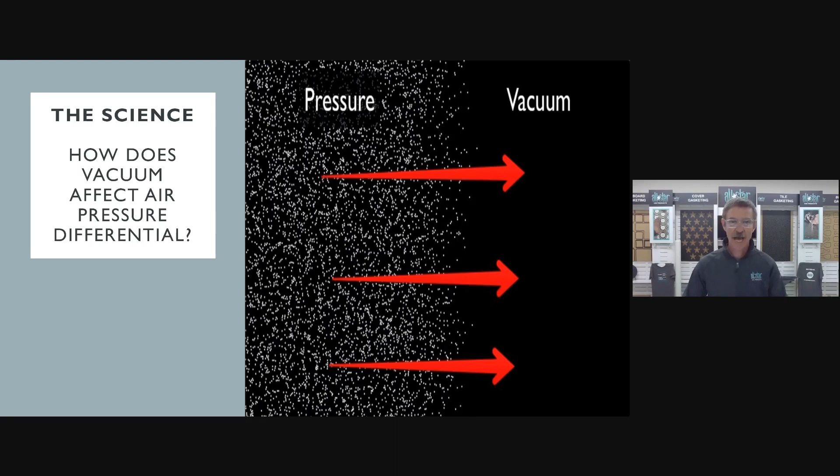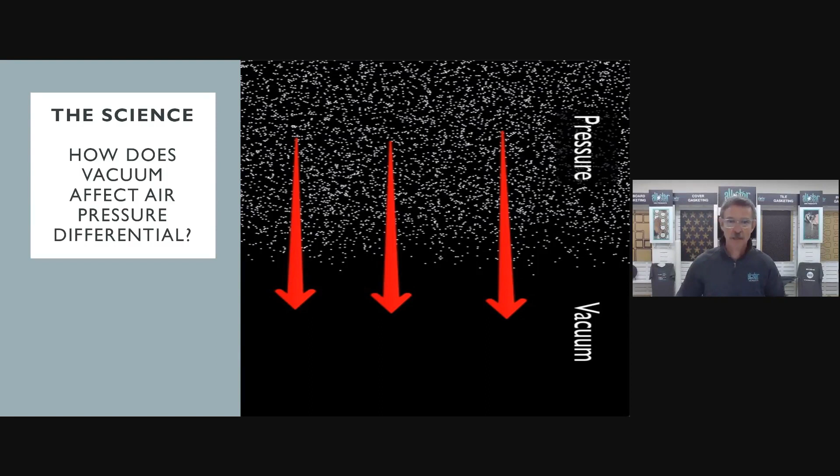So it's a big difference between downdrafting, where you're almost asking a wind to hold a part in place, and vacuum clamping that we're going to get into here, which is a different science. We're not just improving things, we're changing it. So we want customers to get their minds around the vacuum concept. If there's a void of pressure, the pressure is going to go up against it. That's what science says. And in the router world, it probably looks a little bit more like this, right? We want that pressure of the atmosphere to come down on the part and hold that part in place, so that the more parts you cut, they're staying still and you're cutting them fast.

So air pressure differential is also used on this planet in other manners. Anyone that's ever flown in a plane is taking advantage of air pressure differential. The air pressure above the wing is less than the pressure beneath the wing, and that's what causes that plane to lift in the air. So if we can get a 747 to 30,000 feet, maybe we can use that same pressure differential to get a drawer front to stay down on your router.

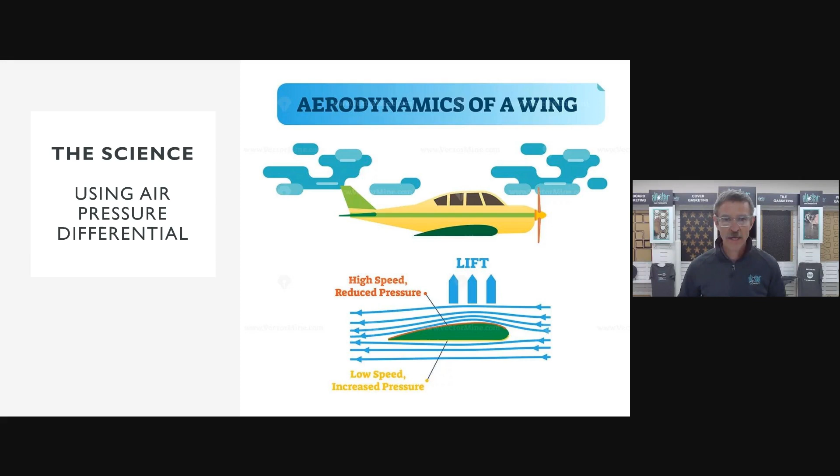So when we get into this idea, we know that all of the customers we've dealt with over the last couple of decades are unique. There are so many variables that each shop is going to come to us with. There's a list of them here. We can go through types of routers, the strength of the vacuum system that they're using, the size of the parts. Are they cutting plastic? Are they cutting wood, up spiral versus down spiral tooling, elevation levels? There's just a laundry list of variables that factor into each shop and how they manage cutting their parts. So we know that there is no one size fits all, because there's always a variable that's going to change from shop to shop.

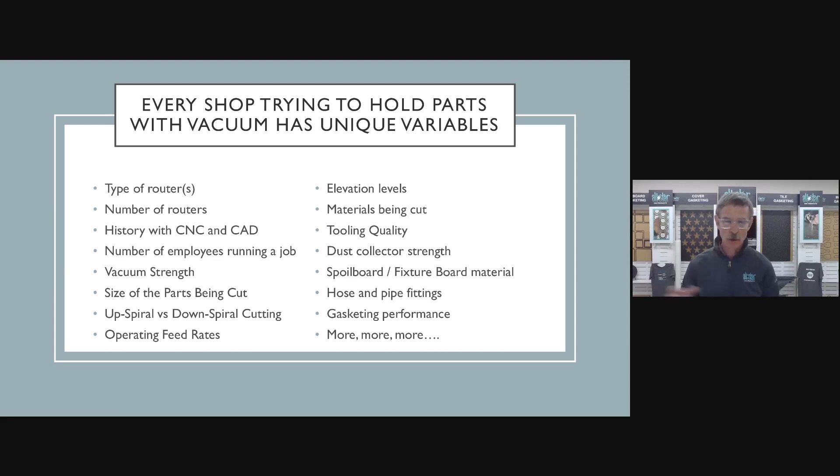And knowing that each shop is a little bit different, there is going to be no easy answer. So we'll go through a whole bunch of different options here based on what is going to be the best fit for you. So ultimately, the test is, can I hold my part? Yes or no, right? When customers can hold their parts successfully, they usually don't call us, right?

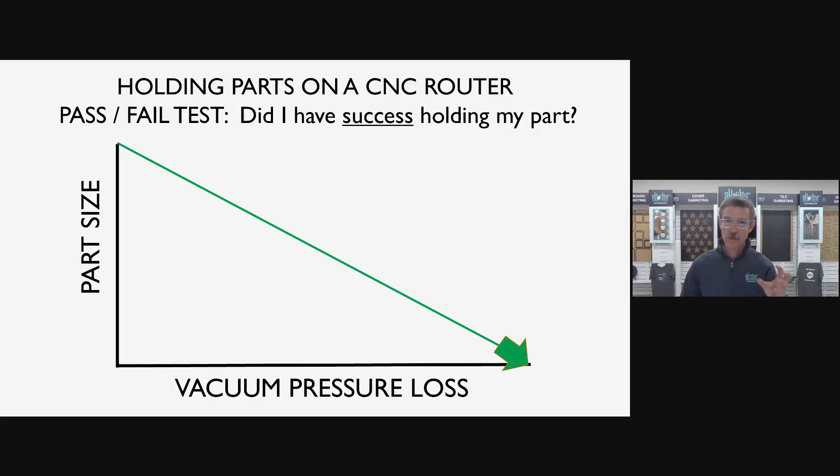We don't get calls from people saying, hey, my vacuum's working great. What are you guys up to? Our phone rings when customers can't hold parts and they need to get better vacuum performance. And why can they not hold their part? Well, there's usually a couple of variables playing in there. As part size gets smaller, as most of you probably experienced, it becomes difficult to cut. Vacuum pressure loss is the other variable that we need to account for.

And as vacuum pressure loss increases, at some point, there's the place where you can't hold your part, whatever part that is, whatever vacuum pressure loss it is. So that is the area that we need to concentrate on. And the fact that we can't change the size of the part means we've got to change the only other variable that is available to us, which is vacuum pressure loss. So with the gasket solutions we're going to get into here, the main concept is to prevent the loss of vacuum pressure, prevent the leak of vacuum pressure, because leak is the enemy.

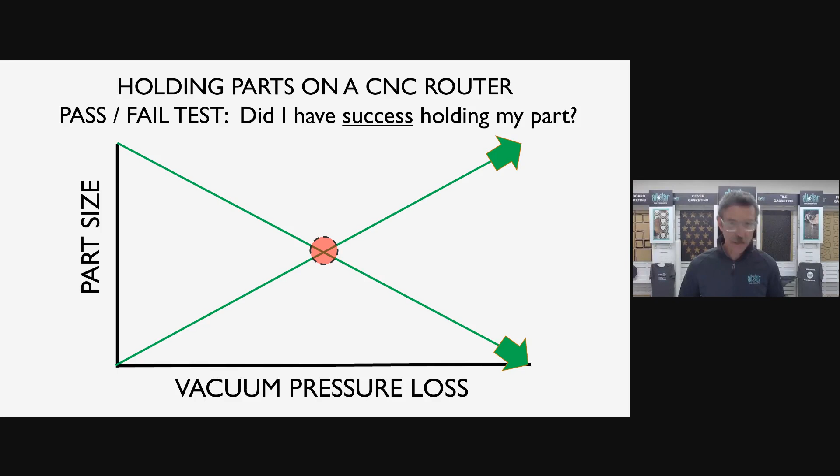Your vacuum pump is capable of great things. It's not always the size of the pump, it's how you use it. So it's capable of great holding power as long as we eliminate the leak that is inherent in the system. So we can get into that a little bit here. First off, very first question that we ask those customers who call us, like I say, they're usually the folks that are having trouble holding their parts. So when that phone rings, the first question we ask, what type of router do you have at your shop there? And when was the last time you changed the grid gasket in that machine?

Because I think we have to start here. A lot of folks are interested in their parts for good reason, but we have to start at the base, what we call the foundation of the house. So we always talk about the grid gasket, what kind of machine do you have, and do you have that thing set up properly? So in order to do that, we're going to send you guys a quick poll here. Second quick poll question of the day. When was the last time you changed your grid gasket? A couple of different options up here if you guys want to submit some answers.

We always want to know what machine we're dealing with, it gives us an idea of what kind of vacuum strength it has. And we want to make sure that customers are getting the concept of a fresh seal in that table. When customers haven't replaced their seal in a couple of years, or maybe since they bought the machine, sometimes a fresh seal under that spoil board is all the improvement that they need to cut those parts. So let's get some of those answers coming in. You guys can take a look at those.

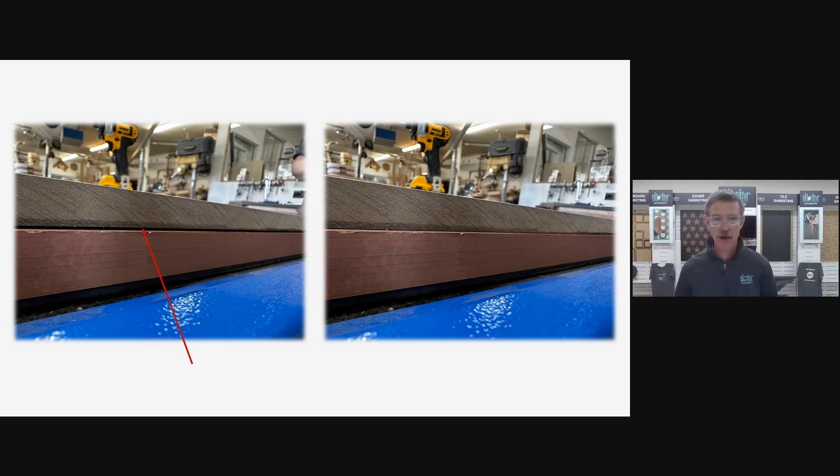But if there's a gap that exists there, vacuum pressure is somewhat like water. It's going to travel the path of least resistance. The easiest way out is where it's going to head. So vacuum pressure can certainly escape from a gap like this. Picture on the right, a little bit more sealed, and we've done that with the gasket material in there in this regard. Oops, let me, there we go.

New toy. So that gasket in that table there, as you can see, sticking proud above the channel by about 1/16 of an inch in this case. And when that vacuum engages and that gasket sucks down, brings that spoil board flush up against the table, eliminates those leaks, eliminates the gaps where that vacuum pressure is going to get away from you. We want to make sure that that table is sealed all the way around. And we do this a few different manners.

The grid gasket is intended for all of our customers. Anyone that's using a router with a grid table, I believe, should use grid gasket in there. Anyone that says their machine doesn't need grid gasket, I would have a respectful disagreement with that. I think gasket seal is a great solution to get that lip of the freezer door mentality.

We always talk about if your ice cream at home doesn't stay cold, don't question your freezer. Let's check the lip of that freezer door first. Make sure that cold air stays in there. And for a router, let's make sure that vacuum pressure stays in there. And we have to maintain it in all the manners that we can. And especially tables with multiple zones here.

The grid gasket rules of thumb that we've passed along over the years. One size does not fit all. As I say, there's a lot of different machines out there milling their channels at different sizes, different widths, different depths. So we have to assume that there is no one size fits all. Channel size dictates gasket size. Let us know what that channel size is, width and depth.

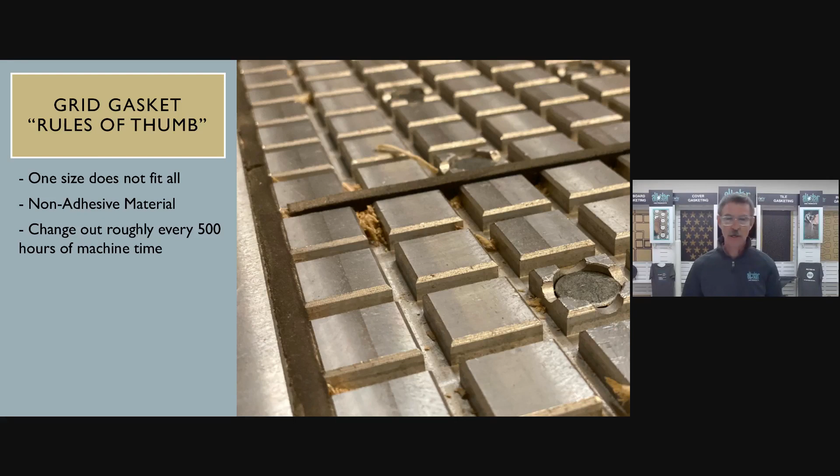If you change the oil in your car every 3,000 miles, let's use the 500-hour mark as a good time to replace that seal. It is much like a filter in your house. Get a good seal to get maximum performance out of that vacuum system. And vacuum is really the only tool that is often used to hold parts. We're not using vacuum and clamping, vacuum and gluing. If you're using vacuum, as we say, let's max the vac, and this is where it starts.

Other rules of thumb that we like to talk about is round pegs don't necessarily fit into square holes. So why we put round gasket into square channels is a mystery to us. We always think that square gaskets are a much better fit. You can see these round cords, very often oversized, which is good. You want it to be taller than the channel, but round cord is often wider than the channel as well.

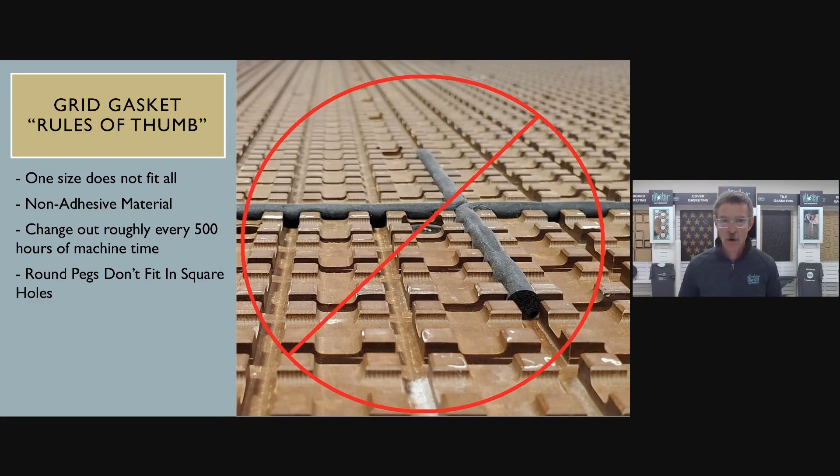And as a human, getting a wider gasket into that channel, you've got to stretch it, you've got to mash it in there, and that leads to some irregularities. And you can see that right here in this photo, where what we like to do is provide our square gasket. We cut it with our equipment here, cut it to the width and depth that is required for your machine, so we get a proper fit in there, consistent, less leak.

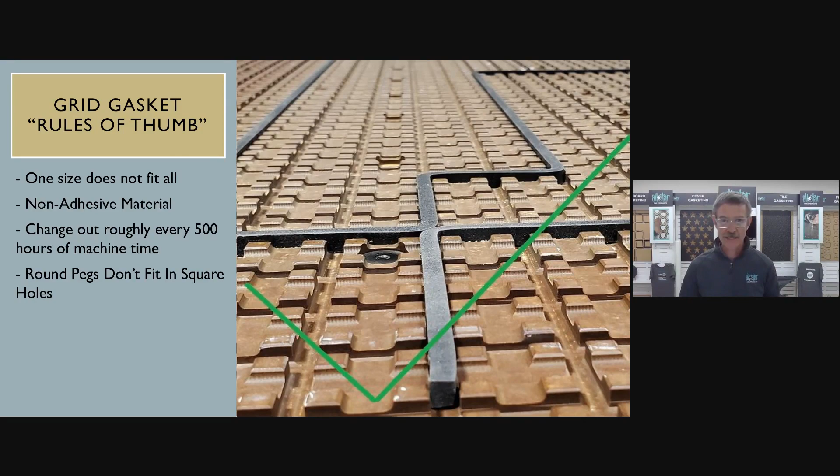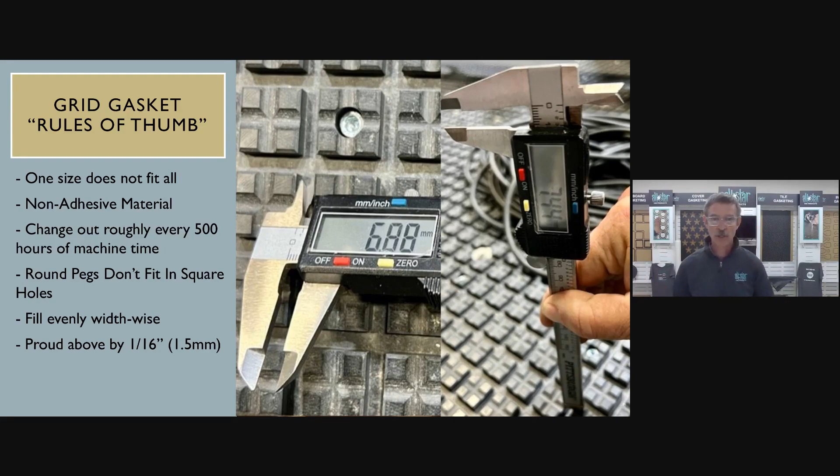That's the number one thing. And so we ask customers to measure both the width and depth of those channels. And as we say, if it's square, we're going to get you a square gasket. Some channels are rounded. Some different machine manufacturers will put in a rounded channel, so maybe we'll put a round cord in there. But really, each machine is a little bit different. We can help you out to figure out which one's going to be best for you.

Some examples that we'll look at over the years as we go to customers that have part hold challenges and everything looks good. But as we start to take the spoil board off and start to explore why they can't get vacuum part hold, we'll start to see things like this. This was a customer that had a pretty major gap right in his grid, trying to make a grid table, and that gap, combining those two boards, was the massive loss of air that he was getting. He wasn't getting that vacuum. He was just trying to use that wind of a vacuum cleaner versus a void of air. So this gap here caused a problem.

Other problems that some shops may deal with: very often we hear of customers who are screwing down their spoil board to the table. And sometimes if they take those screws out, those extraction marks will cause some irregularity in the table surface, and that spoil board can't flush out. So again, there's more gap opportunity for that vacuum to escape, and that's what we don't want. So we sanded down that table, made it flat, made it flush against that table. Much better vacuum performance once we did that.

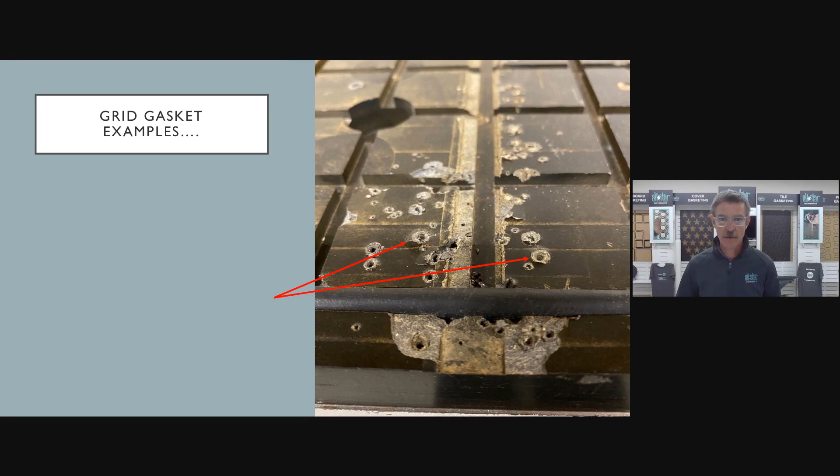For all the companies using gasket under their spoil boards, many folks are doing that, but I've yet to meet the company that has invested in a CNC router in order to hold spoil boards, right? We're always after parts. So anybody that gaskets their spoilboard, I think, is doing a fantastic job. But maybe there's an opportunity here to go a little bit further.

And in that regard, we'll launch another poll here. What is vacuum clamping? That's what we're about to get into. It's one thing to gasket under your spoilboard, but now let's deal with parts. And vacuum clamping of parts is really the sea change that we're trying to get into our customer shops. We're curious what you guys know about vacuum clamping, how it works, and there's a couple of questions that we'll put out to you to see what you think.

And I will close my screen here. Fantastic. We'll look forward to seeing some of those results as they come in. Maybe we can share them towards the end of the presentation as well. So we got quite a few responses here, Mike, and it looks like they've been listening, because everyone has answered B, using a vacuum chamber to create negative air pressure under parts. So good listening, everybody, and let's hear a little bit more about vacuum clamping from Mike. And this will all be on the test later, so good job, everybody.

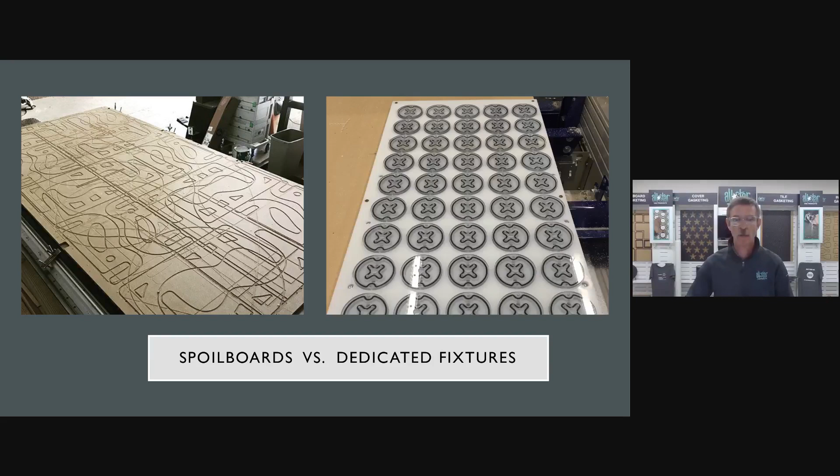So the easiest way that we determine what product line we're going to recommend to a customer is to ask them about the parts that you're doing. Are you better off using a spoil board or a dedicated fixture? Because I think those are two different things. A spoil board to me is a board that is intended to be spoiled. We're going to spoil it. It's a consumable surface because we have so many different parts to make.

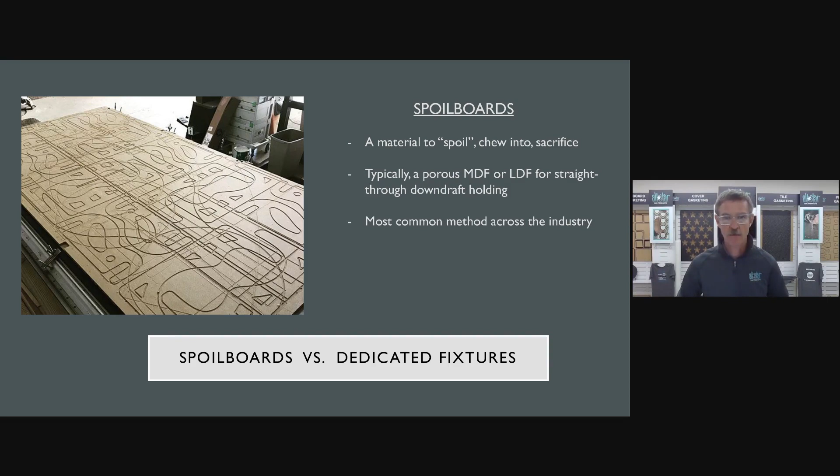We have that sacrificial cutting board under your parts that you chew into throughout the day, fly cut it every once in a while when vacuum performance degrades. Typically, all the wormholes that go into an MDF spoil board, a porous board, lead to some of that leak. So you need to fly cut to improve the vacuum performance, because it's the leak occurring through all those wormholes that requires that improvement. So that is an MDF spoil board, very commonly used throughout the industry, probably the most common application for CNC routers throughout the world.

As opposed to a dedicated fixture. A dedicated fixture is a dedicated board, and I think the best ones are airtight. Let's make it out of Baltic birch or an HDPE material that doesn't leak vacuum, doesn't leak through the sides, doesn't leak through the tool channel. Some people will edge band their spoil boards. We'll talk about that more in a moment.

But the airtight dedicated fixture, if we spend some time to make an airtight fixture, most customers will tell us the time they invest in making that fixture more than makes up for itself in the time they save once they put those parts into production and really get more parts, less time, eliminate the onion skins, the tabs, the low feed rates. So a great option for those production shops is the dedicated fixture.

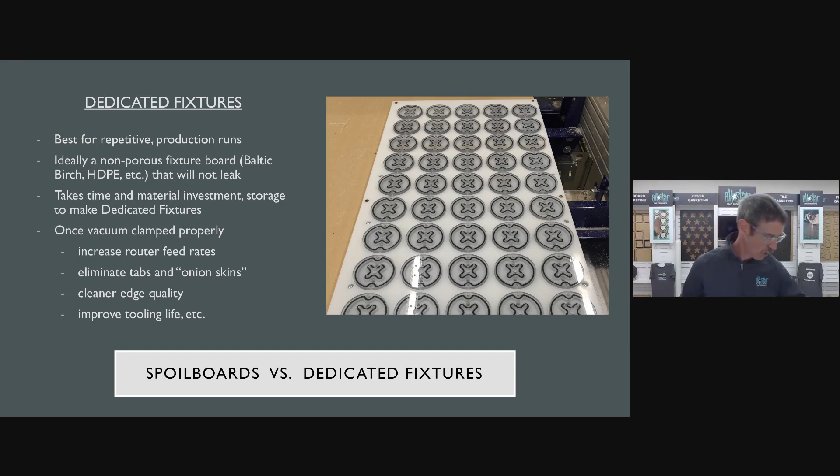So that will bring me to this screen here, going through the difference between downdrafting and vacuum clamping, because that's really what we're going to get into here. Downdrafting through an MDF spoil board versus vacuum clamping, I'm going to let Alex take over a little bit to talk about the science between the two. Thanks, Mike. Appreciate that. So as we illustrate here, these are comparisons between downdrafting and vacuum clamping. And I think what's great to do here is paint a scenario for our attendees, many of whom might be nodding their heads when we talk about this.

When we looked at the polls and who's in what industry, many of these attendees are running nested programs. No matter what software you're using, once you've laid out your project, oriented your parts, you're ready to go. You put your sheet good on your CNC and you hit go. Well, at that time, and that time only, if you have a vacuum gauge, it would register its peak value during that project. Once you begin to cut, the vacuum gauge is going to decrease over time through that project.

And the reason for this, of course, is physics. Air is a fluid, and physics dictates that air will always travel the path of least resistance. So when the vacuum gauge is at that peak value at the beginning of the project, in my humble opinion, that's not indicating vacuum hold on the part. That's actually indicating resistance to the vacuum system. When you put that sheet on there, you've created a dam, and that pump is struggling to pull air through that open MDF. As we cut, we're opening up channels and creating less resistance, and that's where the air is going to flow.

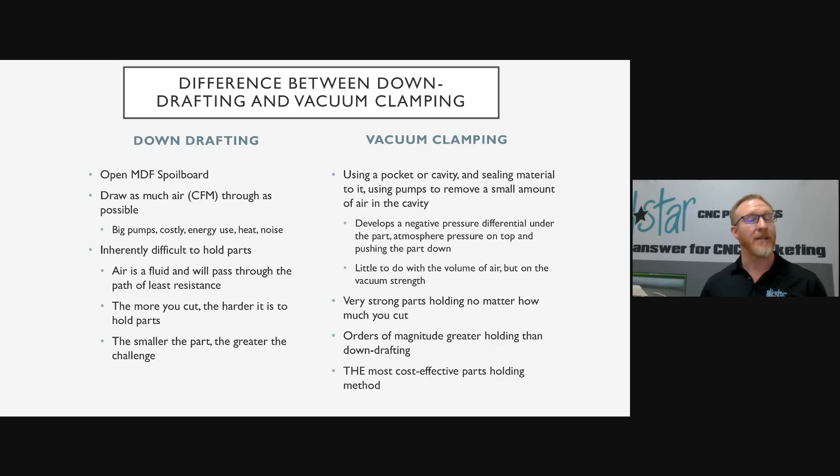So downdrafting is inherently difficult. It's almost flawed by comparison to vacuum clamping, because the more that we cut, the harder it is to hold parts. And the smaller the part, the greater the challenge. I'm going to share a quick video here. This video has been shared a lot, but maybe some of you haven't seen it yet. It really illustrates this aha moment.

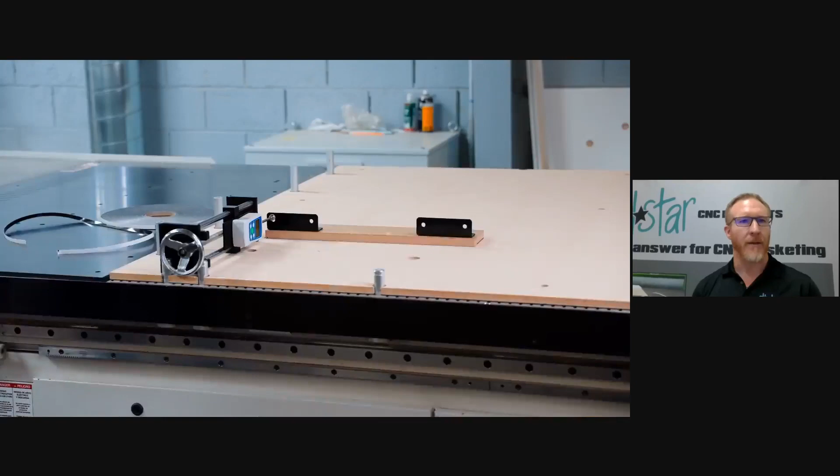And here we have Mike. We're at a customer's facility, and we have a test gauge that we're using. Here we put a typical drawer front on the open MDF. All that air is flowing around it. We're turning on the pumps and trying to see how much pressure it's going to take. It was actually 21 pounds at its peak to kick that part out at its fulcrum.

So that's downdrafting. Now, what we're doing very quickly, very easily, in just a matter of moments, we're simply using a gasket to seal up against the part. And that gasket's not only sealing, but it's creating that vacuum cavity or that vacuum chamber. So if we're able to remove just micrograms worth of air underneath that part, turn that on, and then let's take a look at the difference.

We went up to 120 pounds of force to move that part compared to simple downdrafting. And that is the power of vacuum clamping. That's the physics really that we employ in all of the work that we do. So as we move forward and going through this entire presentation, it's really focusing on the science behind what we do, and hopefully that resonates with many of you and is informative as well.

So I'm going to pass this back over to Mike for him to go ahead and continue out this presentation.

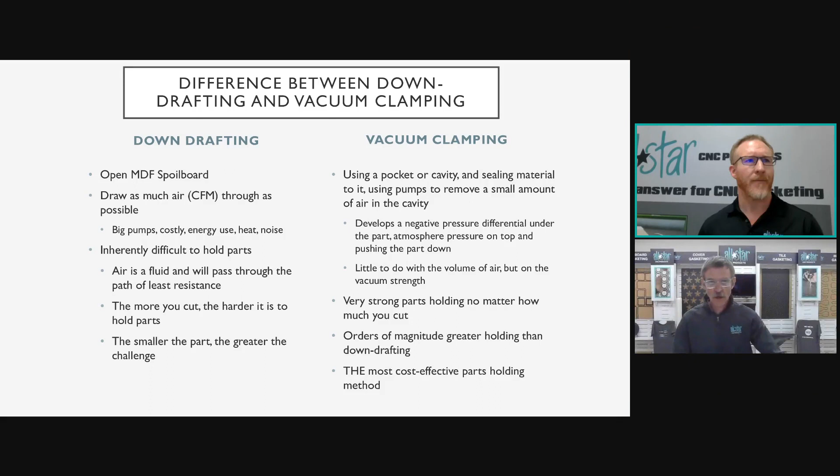Alex, thank you. Just to give a quick visual about what that vacuum clamping is. You can see a massive difference between downdrafting through that MDF spoil board and then introducing that gasket to create the cavity that we're going to pull the air from to produce that air pressure differential. So we'll get into a whole bunch of different ways to do it, but the science that is taking advantage of is always the same. Create the space, pull the air from, vacuum to hold on and clamp onto those parts. It creates more of a suction cup than just the wind of a downdraft through an MDF.

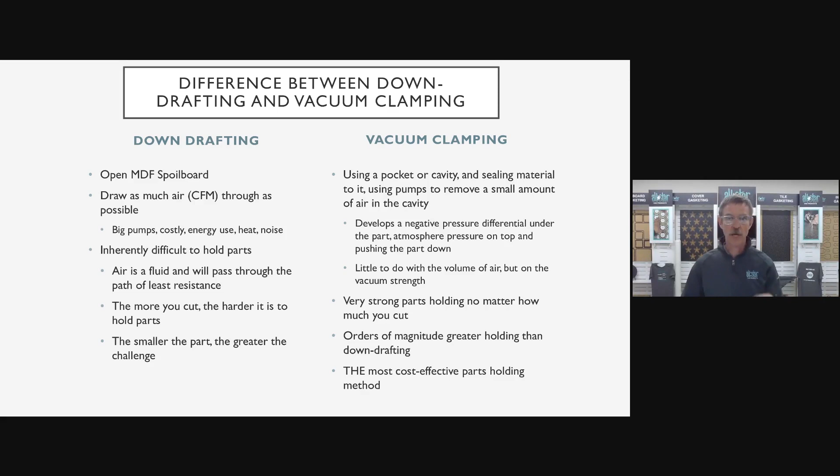So we'll get into it a little bit. And as we said earlier, there are no one-size-fits-all options that we have, and knowing that everybody's in different industry, some of these products may not be relevant to your particular shop, but we're going to go over a bunch of them to help you guys determine which one's going to be best for you.

So first ones we'll get into are the two different product groups that we have available for those doing dedicated fixtures. A lot of our furniture shops, maybe some guitar shops, anyone that's doing production runs, I think can be benefited by using dedicated fixture ideas. So we have the inboard and the cover gasket. First one we'll do is our inboard gasketing. In my opinion, I believe that inboard gasket is the premier way to do this.

A gasket in the channel is going to last longer. It's going to pull the part flush up against the fixture. There's a lot of advantages to an inboard gasket when you get into some of these. And as I said, it's intended for those shops doing production runs. If somebody has a very tight Z depth tolerance that they're looking to hold, inboard is a great solution for that because it will zero out while it disappears into the channel.

Also, anyone that's looking for the longest lasting gasket solution. The fact that it is in a channel, much like the gasket under your spoil board, it's only going to compress by the height of that channel. So it tends to last a little bit longer. It never really gets maxed out. So it extends its lifetime for those production pieces.

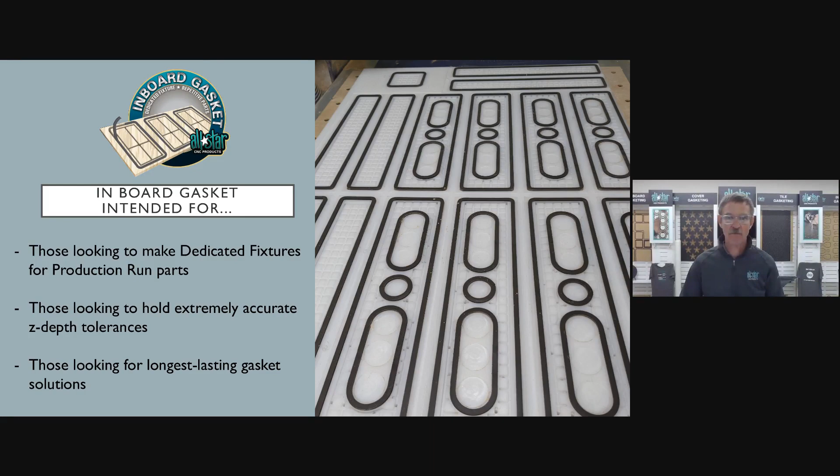Some of the rules of thumb that we talk to customers about, we always mention a 3-to-1 ratio is best when putting the gasket into a channel. Probably 1/4 inch by 1/4 inch gasket is our most common product, our CR 2525. And we usually recommend routing a channel 3/16 deep to leave that 1/16 above. Some customers need a little bit more than a 1/16 of an inch sticking above if they have a very warped or varied surface material.

And if they need more than a 1/16 of an inch, maybe we'll recommend our CR 50/50, which is a half by half, and route that channel 3/8 inch deep to leave that 1/8 above. So depending on the product, how much you want to leave above, but the 3-to-1 ratio is the number we've found to lead to longest lasting gasket material for those production pieces.

We also want to make sure that when we do go to a dedicated fixture environment, the fact that we're using a non-porous material, there is no universal vacuum draft, right? When we're using an MDF board, everything is held by default.

Whether it's good or bad, maybe is a different question, but MDF downdrafting universally tries to hold everything. Whereas when we go to a dedicated fixture that's non-porous, it's the opposite. Universally, it's not holding it. So we need to create vacuum for not only the parts, but maybe also the waste pieces and the offcuts, and make sure those things don't go flying off the table.

I think this is a great example of how I would do a dedicated fixture. Take the existing CAD program that you have that's going to be used for the tool path, and then just to the inside of that tool path, offset it and run your gasket channel. And then just to the inside of the gasket channel, create a third channel, which is your vacuum channel. And if we can run all 3 of those channels parallel to each other with a vacuum source for the

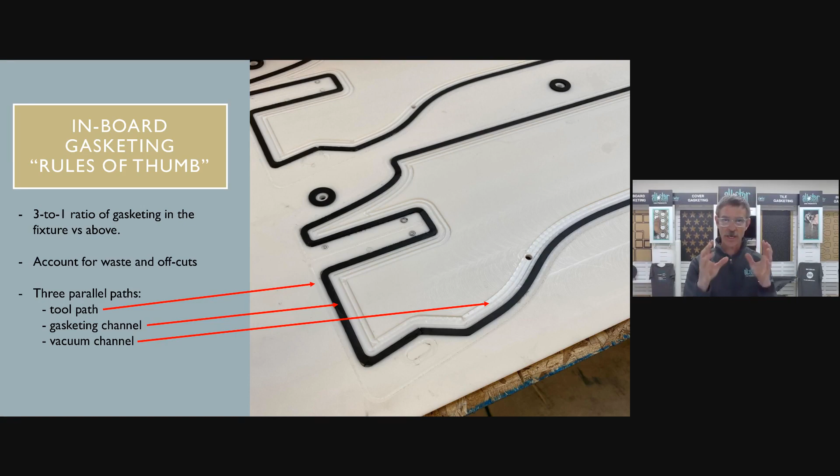vacuum, because the tooling is what's causing the carnage, right? The tooling pushing its way through the part is what's causing things to shift. So the closer that we can get that vacuum clamp to the tooling is what's going to lead to the most success in holding those parts.

We also recommend using a chamfer bit to create the channel for your dedicated fixture idea. All-Star has created a line of specialty chamfer bits for different size material: quarter by quarter, quarter by 3/8, quarter by half-inch gasket. We always recommend some of our chamfer bits. The 25/25, 25/38, and 25/50 represent the gasket size that you get.

And what that does, it just creates a slight chamfer at the top of the channel, so that gasket has an ability to zero out. You don't want it to pinch between the 2 surfaces, so that would do a great job of allowing that gasket a little bit of extra wiggle room, and we always recommend using those tools for that.

That being said, what we're going to do is send it over to Daniel. Daniel's going to do some live demos here, doing some of this inboard gasket to show some of the benefits of the chamfer tooling. Daniel, take it away. Mike, thank you very much.

So here we are with our vacuum tray. This is a collaborative effort to answer some of those desktop CNC routers that may not have vacuum. Those ShopBots, the Avids, the potential Onefinities, where a customer does not have a vacuum table but would like to add vacuum to their part hold. In this example here, we have grid gasket running down the channels surrounding these 6 vacuum ports.

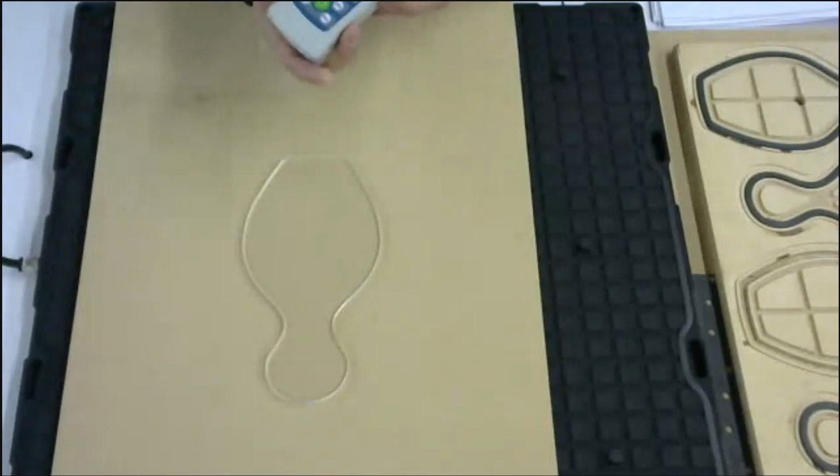In a production type setting, if we have to do 1,000 of these parts, what tends to happen is as we cut away from the main sheet of material, we'll end up having to do onion skins or tabs to hold small parts like this. As you can see, even with the vacuum on, the part is still moving. In fact, if I take my pressure gauge right here and give you an example, 2.6 pounds of pressure is all it takes.

So you can imagine on a large production with a tool going around the outer perimeter of the part, that could cause parts to shift, potentially kick off, be a hazard. What we want to do is seal the part, seal the space underneath the part, and create a production type model so we can lay different sheets down and continue to run without having to worry about parts shifting.

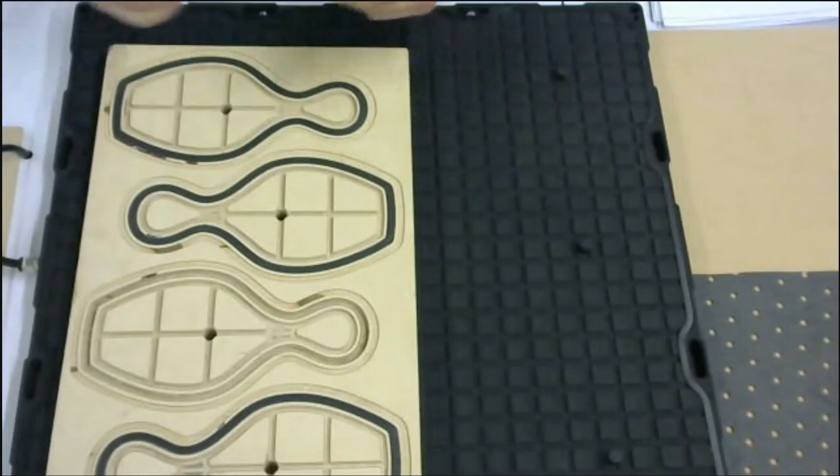So what I'm going to do is replace this with a non-porous material. In this particular case, this is Baltic birch. You can see, as Mike mentioned, we have our chamfer bit here. This was created to create a channel for the gasket to reside in. We have an outer tool path for where the profile of our part is going to be cut. Independent vacuum ports going directly to our vacuum plenum with a space for the vacuum to be pulled as well.

In this example, these 3 vacuum ports are closed off underneath. We are focused primarily on this single vacuum port right here. We have our part in place. And a leak somewhere.

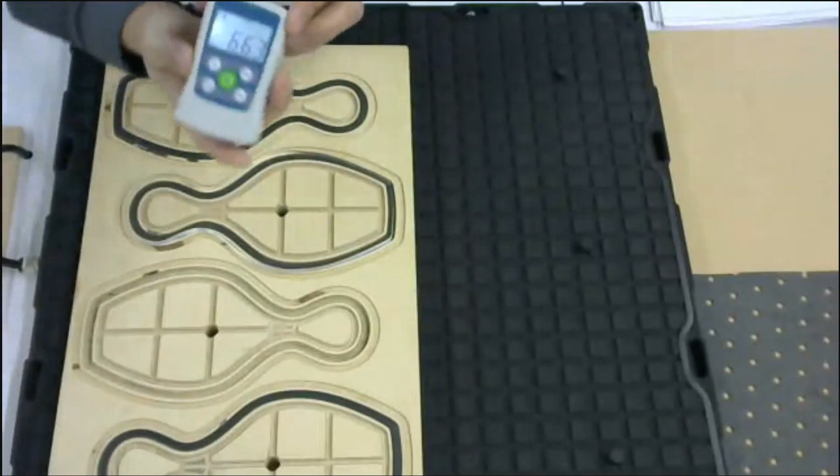There we go. We now have a part in place. There was a leak underneath the grid gasket. Now that that is solved, starting with the foundation of the house, of course, the pressure to move the part has jumped exponentially. I'm now at 66 pounds of pressure, and I was unable to move that part. So you can imagine the carnage of the tool path of the router bit; you want these parts to be secured in place. And this allows us to run multiple sheets without having to worry about onion skins or tabs that we have to clean up later.

I'm going to send it back over to Mike. Thank you very much.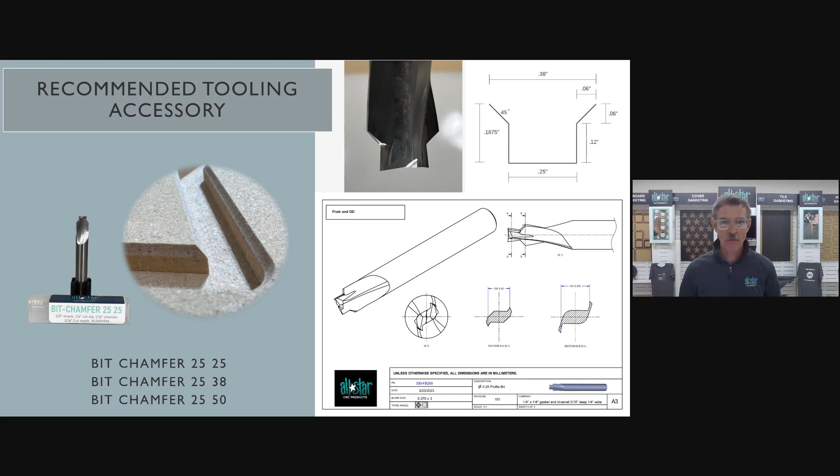Daniel, fantastic job. I actually enjoyed the fact that you had a little tough time getting that initial vacuum clamp, because that shows that if there's a little bit of a leak going on, that really solid clamp doesn't take effect, right? We're not getting vacuum because there was a leak somewhere and we had to reset that jig to make sure that it was airtight all the way around. And that's where we had the success. So great job of showing that all situations need to be accounted for and all leaks need to be eliminated. So that was a great job of showing some of those concepts.

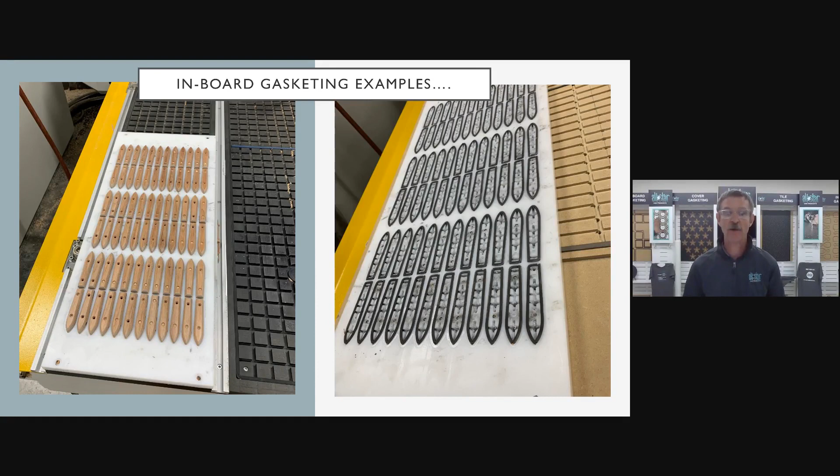Here are some real world examples that customers have sent us over the years. Knife handles, obviously a very small part. This customer was attempting to cut knife handles through an MDF spoil board and was having zero success. So he called us, we talked him through building a dedicated fixture for himself, and we're very happy that he found us in order to get these jobs done.

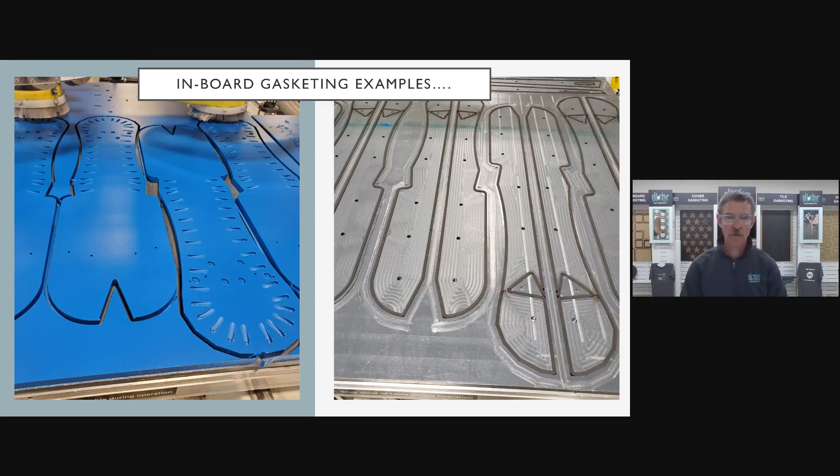Another customer, poly furniture, always a difficult product to hold and cut just because it's so dense and there are varied surfaces. Sometimes that man-made grain in the surface creates a great deal of gap, and that's where all that vacuum is escaping. So by creating a gasket seal all the way around there, it's much easier to clamp those pieces. And this customer is a big user of our inboard gasket material to get all that poly furniture out his door.

We have another furniture shop that made a fixture out of melamine. He even has these fixture parts raised up a little bit so we can do some profile work around the edge. But again, an airtight fixture. You can see the vacuum source, the vacuum channels running right parallel with the gasket path. So great options for those folks who are doing the production runs.

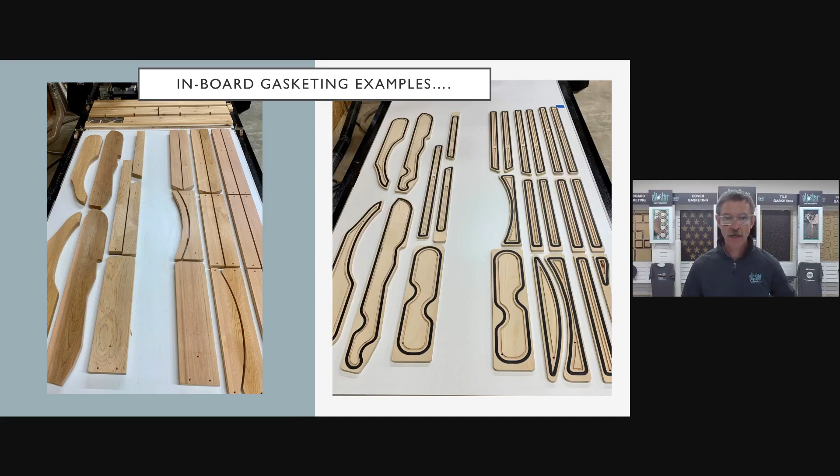Another great option came about based on another customer request, right? We're not smart enough around here to make our own products. It's you guys, the customers, that explain what your challenges are, and we work with you to try to figure out how we can address that. And as a result, that's where the product line has evolved from.

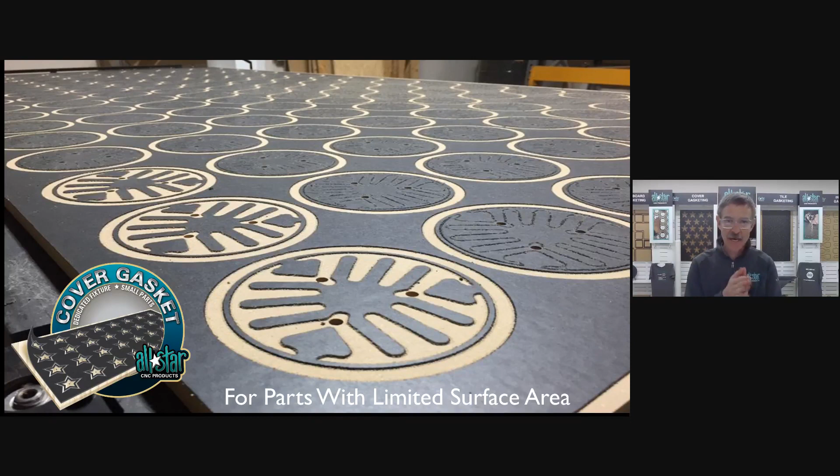So one of the questions that our customers had for us was, hey, can you guys make this gasket narrower? And we couldn't figure out why you wanted it so narrow. It's basically because he was doing really small parts, and what he wanted to do was get that gasket in and out of those tight areas. And he thought the thinner way to do it would be better. But as opposed to a thinner, narrower gasket, we decided to try out some cover gasket. And that's where this product line came about.

And it's a great solution for those folks with parts with limited surface area. It's really intended for, again, we're still maintaining the dedicated fixture environment. So those production run pieces, but maybe they're not large furniture parts. Maybe they're small, tight angles. I always like to use the example of a star from our customers, because all those five points of the star are very tight angles that would be difficult to gasket for with an inboard gasket solution. So limited surface area, tight angles, or parts with excess holes.

You can see this was a Christmas ornament that had a hole in the top. If your part has a hole, and you have a gasket perimeter on the outside, and then you put your hole in there, your vacuum chamber area has been compromised. So you're not going to get a vacuum clamp with just a perimeter on a part with a hole in it.

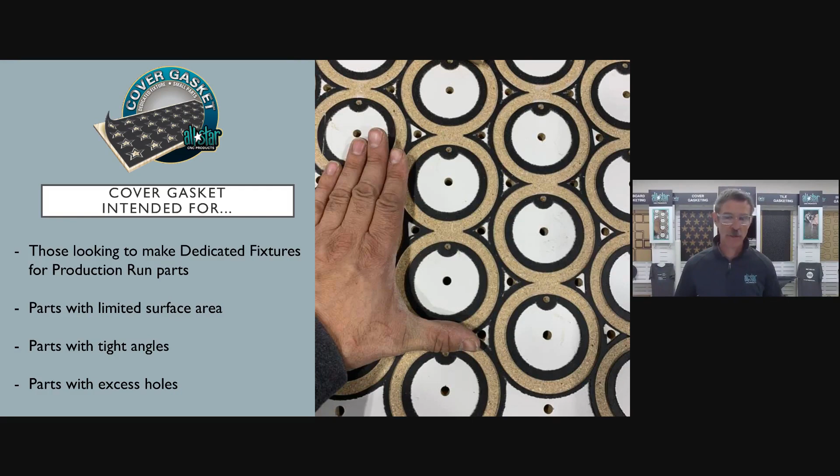So you need to account for that hole to keep that vacuum secure. So again, cover gasket, a great solution for parts with a lot of holes because you can account for that.

And again, still in the dedicated fixture environment, we always recommend folks use the full sheet, and we have some engraving tools cutting out, and you can use the existing CAD that you have. So sometimes the router itself can do a great deal of the fixture building for you because you're just offsetting some programs and downsizing to get your vacuum chamber area for your particular part.

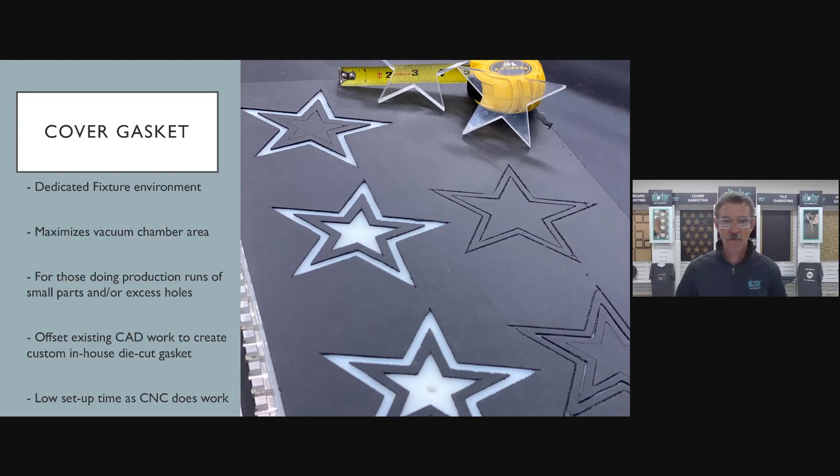The rules of thumb that we have, we always say that the thinner the better. The thinner the gasket, the less deflection it's going to cause, the less variance it'll create, the less jello effect it'll have. So the thinner the better, but of course you need to have enough thickness to counteract the variance in your particular material. So the more variance, the thicker it needs to be.

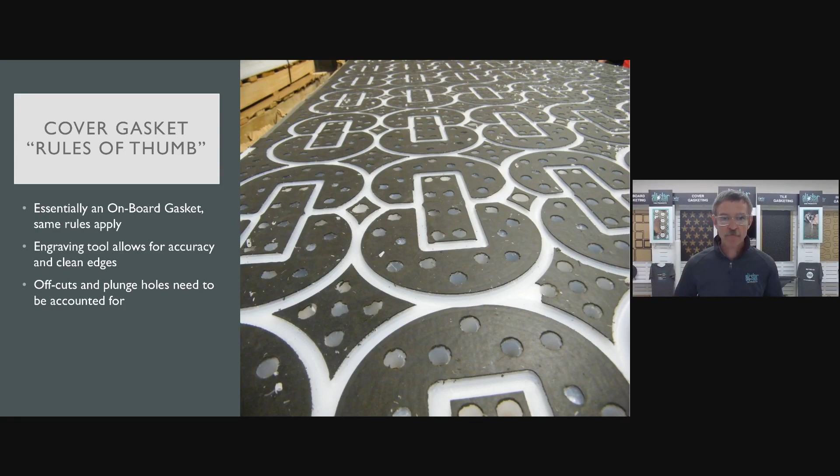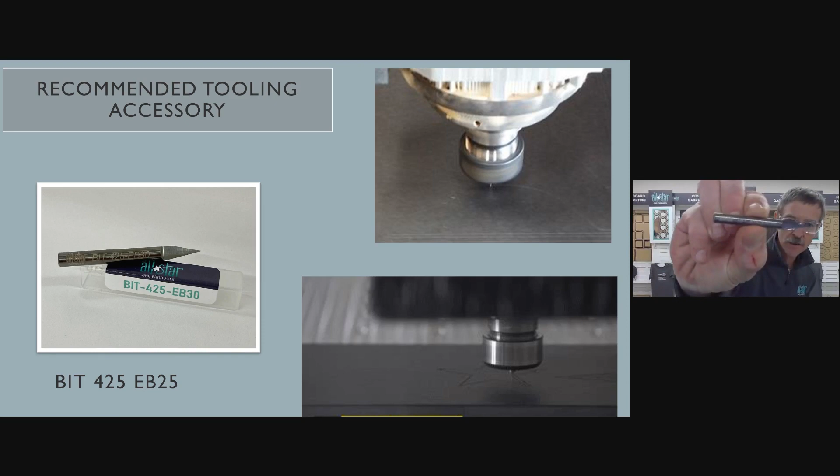Here is the engraving tool that we mentioned. Great solution, part of our custom tooling line. All-Star has the engraving tool to create all aspects of the cover gasket lines that you want to do. You can certainly use a 1/4-inch flat bottom bit, for instance, to cut through your cover gasket, but we find sometimes one edge of that path will be clean, the other will be a little bit rougher,

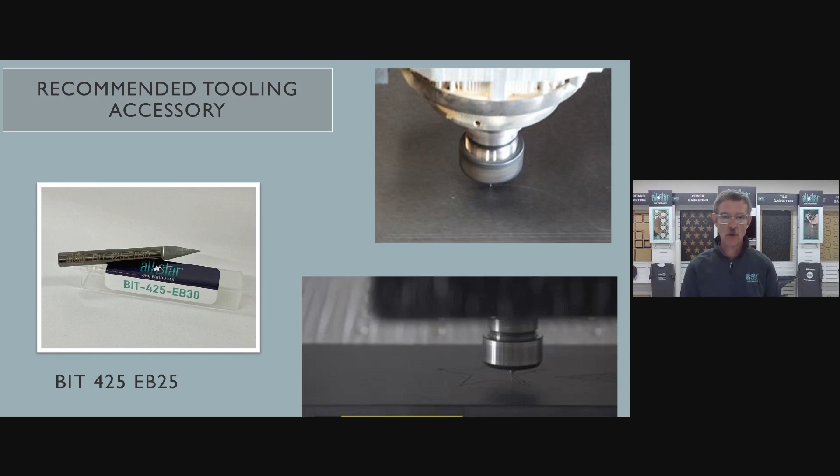and that rough edge of the tool path doesn't necessarily create a problem vacuum-wise, but in these production environments, sheets are coming on, parts are coming off. So sometimes that burred edge of gasket can cause some problems as we're trying to put stuff on and off. So an engraving tool is a great way to make a nice clean edge. And sometimes customers will even create their gasket channel a little bit wider than the tool that they're going to use. So a great solution for those kinds of shops.

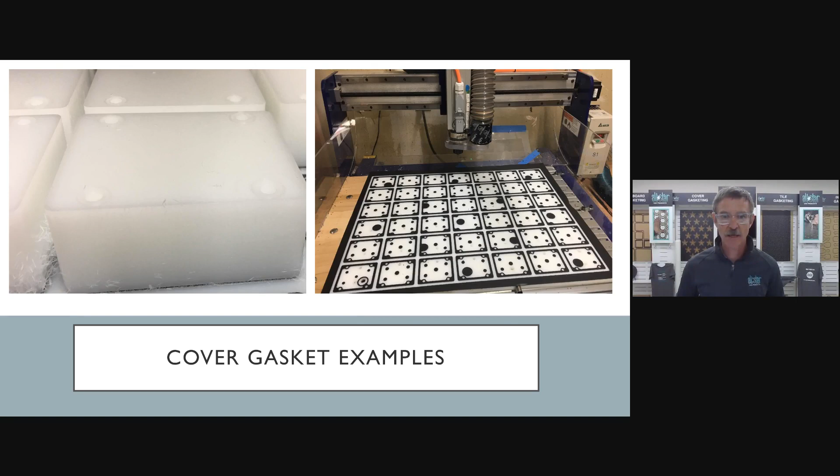Some cover gasket examples. Well, let me go back to this one here real quick. I like this one. Another example, a guy had 4 holes in his parts, in the 4 corners. So those are accounted for in the fixture on the right-hand side. Another example of a hole and a gasketed fixture for these small parts. So that is our cover gasket.

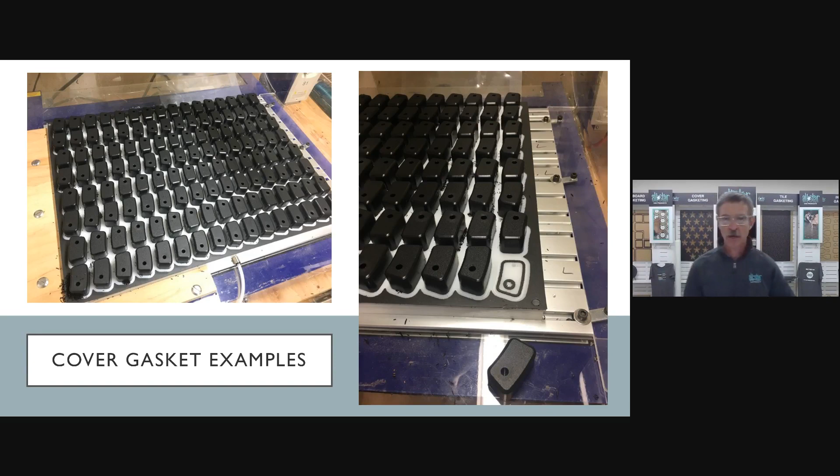So that leads us to the next customer request that we had, further product development, because we have a lot of customers out there that aren't in production environments, custom stuff, short runs. So they don't have the time nor the interest in making a dedicated fixture, but how can I get the vacuum clamp benefits without a dedicated fixture? And for those customers, we have 2 products for the spoilboard improvement. We have our onboard gasket and our tile gaskets. Both are great options.

We'll start out with our onboard gasket. The video that Alex showed earlier at a customer doing the push-pull gauge was a perfect example of an onboard. Real quick, real easy, doesn't take up a whole bunch of time just to stick that down onto the spoilboard to make that vacuum clamp area. The onboard gasket is intended for all those that want the vacuum clamp concept without the dedicated fixture investment. And it's a great way to do that.

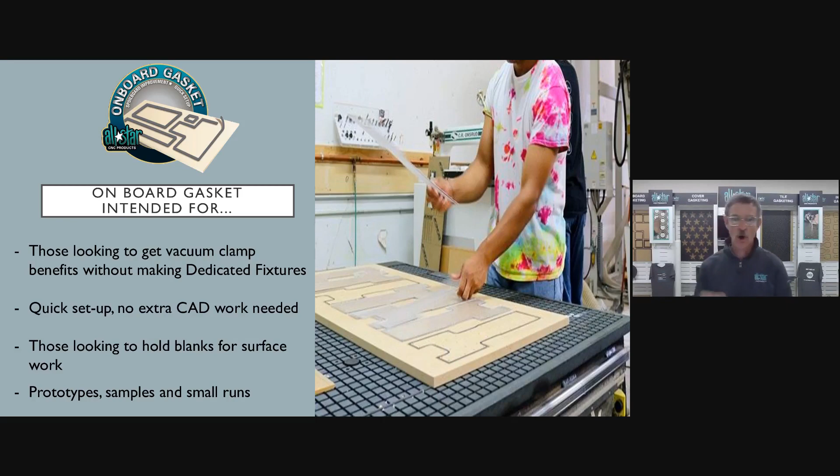Quick way to do parts, maybe some slabs that you want to do some surface work to. So all those things you want to do, quick works, prototypes, great solution. Onboard gasket is that spoilboard. It's a board that we're going to spoil, quick setups. And again, the CAD design can do a lot of the tool layout. Some of our customers over the years will scar the tool path into the spoilboard and then just lay this gasket to the inside of that.

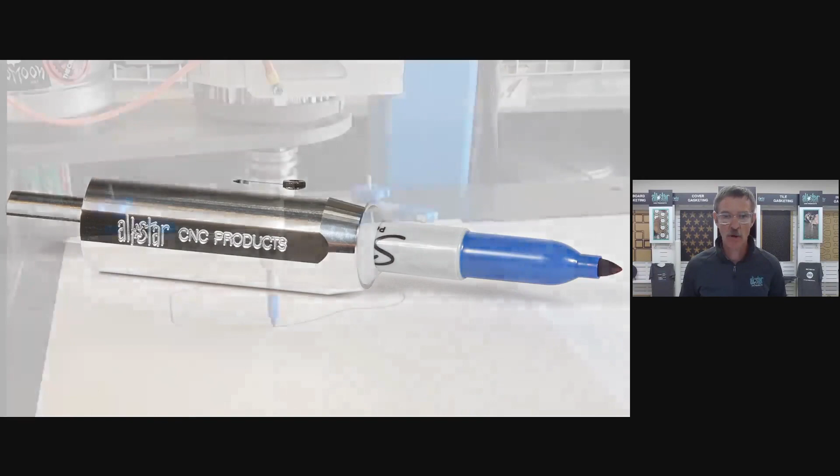As a result of hearing that, we have created yet another custom tool for our customers to take advantage of, which is our marker tool. The marker tool allows a customer to use the CNC to put a pen mark on the spoilboard to dictate where that gasket should be laid out. We can see a customer here laying out some gasket.

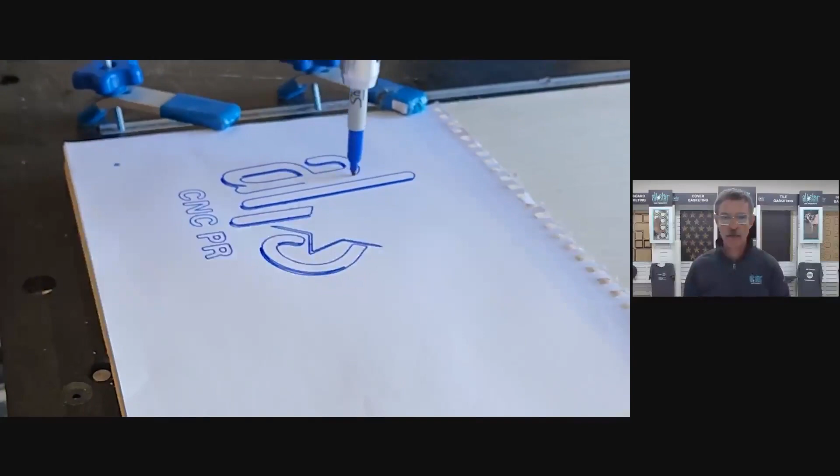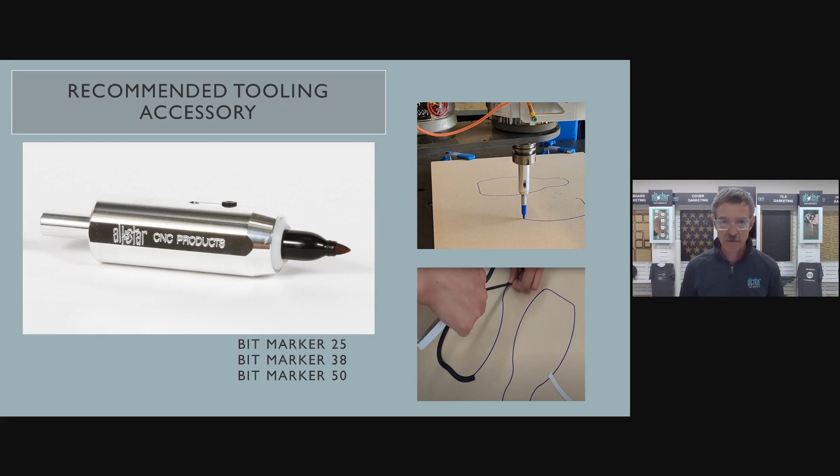And the advantage of doing it this way is, as we mentioned earlier, the more you use a spoil board, the more wormholes you put in there, which creates more and more leak. So customers who use the pen to stick gasket onto their spoil board in the exact right spot are also lifting their parts off the spoil board by a couple of thousandths of an inch. And as a result, if they can dial in their Z, these customers using an MDF spoil board never chew into that spoil board, and we're not spoiling it as much, not consuming it as much as without that gap, plus the advantage of massive vacuum improvement.

Also, the firmer, the better. We have a bunch of different densities for all these products. Typically, our low density products are meant for low vacuum systems. Luckily, the science of vacuum clamping is universal, but the smaller the vacuum pump, the less power it has, the softer that foam needs to be. But we still create a solid clamp. It just needs to be a softer foam.

Typically, the industrial CNC machines in the marketplace these days will use our medium density. That's the most common. And we have firm density for very heavyweight material. But the firmer, the better, because if you can compress it that first time, it's not going to get any harder over the years. And you always want to make sure that Z depth is accounted for, because it is a surface mounted material.

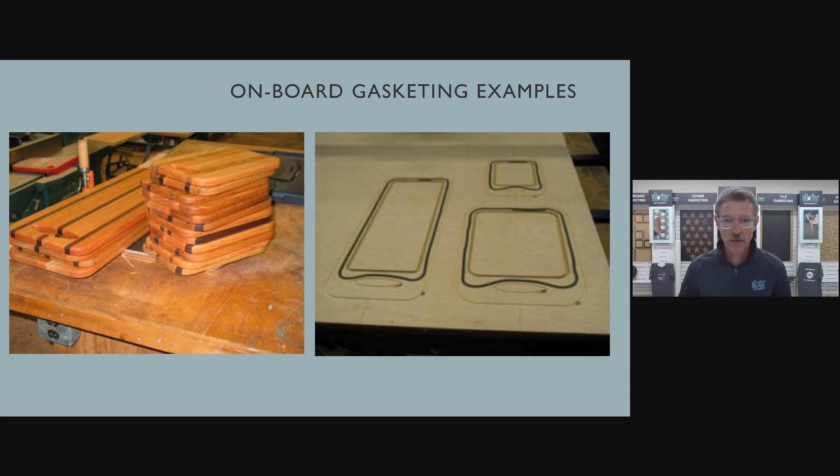And some onboard examples that customers have sent us over the years. We've got a guy who was having a tough time holding some of these cutting boards. So a quick stick down of gasket material allowed him to do these parts much quicker, much easier. And same kind of idea with this pizza peel. The customer had a tough time with those narrow handles. So a quick application of some gasket material certainly aided them in clamping that part versus downdrafting it. So I think that does our onboard gasket rundown.

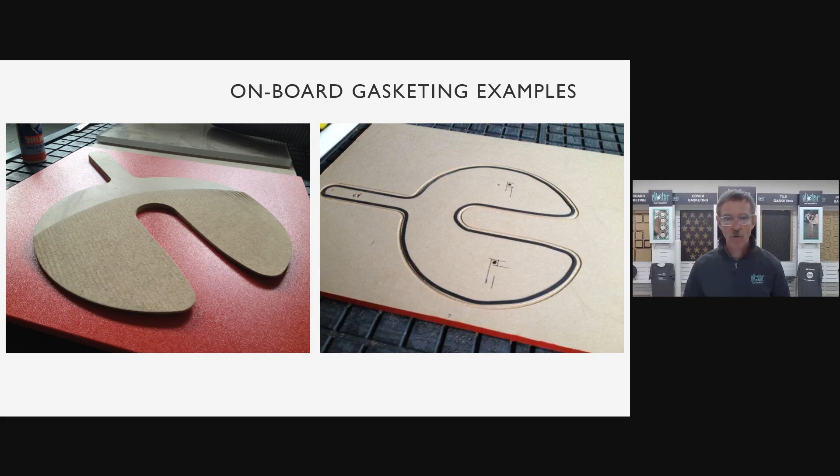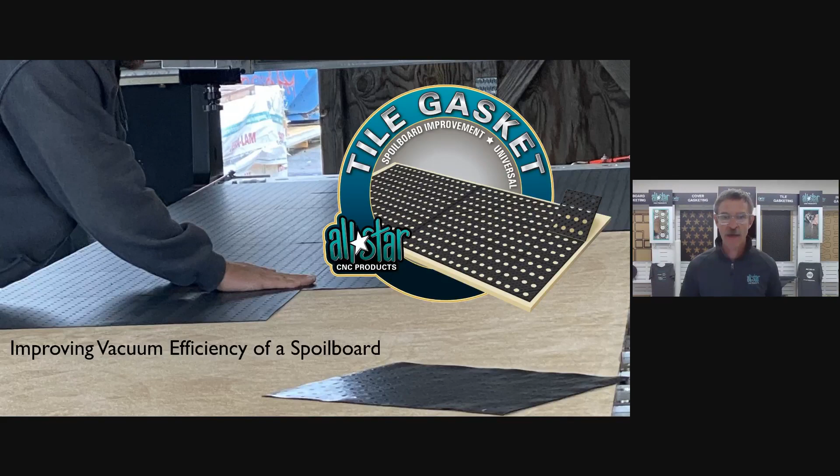So that will bring us to one final concept that customers have requested from us over the years. How can I get vacuum clamping on my always changing, always custom parts? What is the best way to achieve vacuum clamping in that kind of environment? And that is where our tile gasket material came from. Tile gasket is pretty unique, pretty inventive on our end, and there's a lot of interest in it.

And before we get into some of the benefits of tile gasket, we've got another poll question I want to get into real quick: how many of you out there seal the edge of your spoil board? Whether it be painting it, running it through the edge bander, or putting some kind of water glue mix onto the edge of the spoil board. I'd be curious to hear how many will seal the edge of their spoil board for whatever reason.

And, Margaret, it looks like we've got about half and half, yes and no. And as Mike's going to explain, tile gasket somewhat seals the top of your spoil board, but you're still going to get leak laterally on the edge. So sealing the side of your spoil board is very important. We're still about 50-50 on yes and no. So Mike's going to talk a little bit more about our edge seal tape. And I'm going to close this poll up.

Right, Margaret, thank you very much. And it's interesting. I always like to ask that question of customers. Are you guys edge banding or sealing the edge of your spoil board? And I ask them, why do you do that? And it's to prevent the leak out of the lateral sides of the spoil board. And I get that. I approve of it. I think it's a great idea because all leak is a problem. The more leak we can prevent, the better.

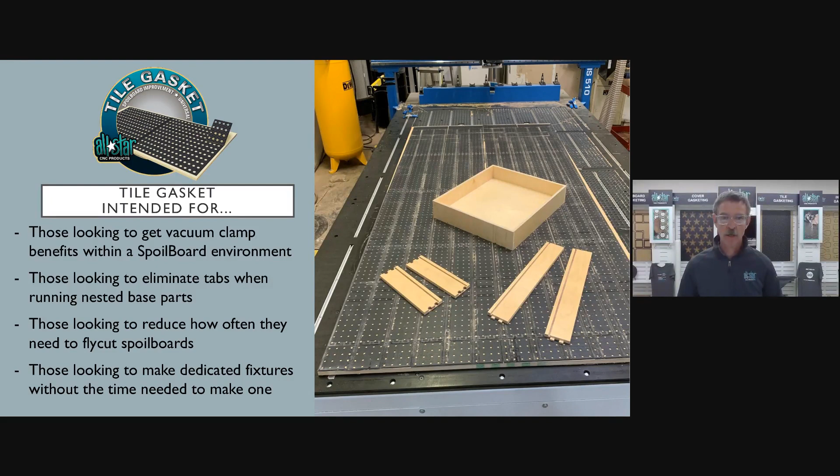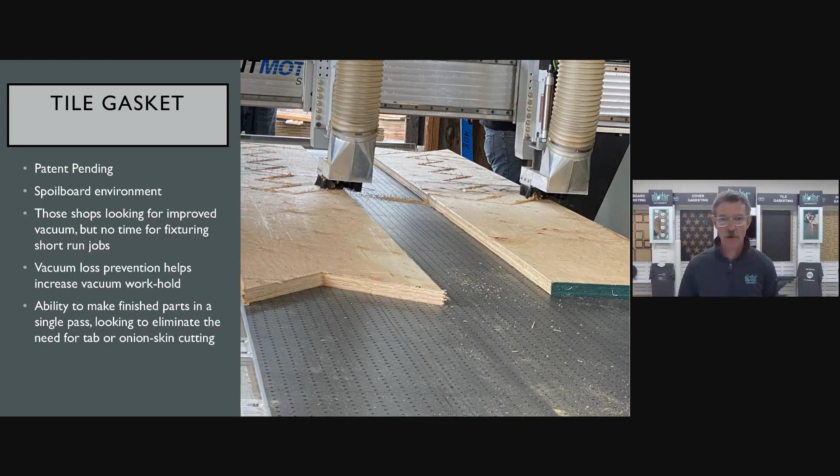It is producing the leak prevention because the gasket material is 95% gasket and only 5% hole. So we've sealed 95% of the top of that spoil board. And all those thousands and thousands of 1/4 inch holes that are left behind are the vacuum chamber areas now. We don't get vacuum chamber in just a downdraft environment. We have thousands of little mini suction cups holding on to a sheet. Now, maybe a 1/4 inch hole isn't enough to hold on to your part, but thousands of them working together in a random area really do a massive job in holding parts in place, holding the sheet in place as you cut it. So great solution for those folks in that spoil board environment, looking for vacuum improvement.

We always talk about the rules of thumb. Again, 5% of it is exposed vacuum area. The other 95% is sealed. That vacuum pressure makes its way through those holes. Great solution. This becomes the new consumable material. So as a result of the tile gasket being the new consumable surface, probably the most important thing we talk to our customers about: every customer that has ever tried this is blown away with the massive vacuum clamping improvement that they get. That is never a question.

The question becomes, we're not in the business of trying to sell magic tricks. We're trying to sell clamping ability, production aids, and the customers who get longevity out of this are the ones that are the happiest with it. We don't want them to be chewing through this because it is a consumable, but the folks that get a lot of use out of it, a lot of parts is what we're trying to produce.

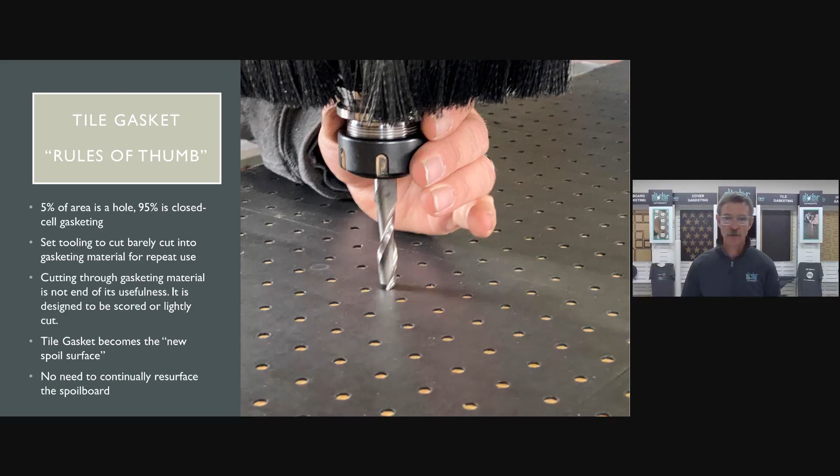And as a result, here's a customer that sent us some photos. This customer applied his tile gasket sets to both of his, he's got a couple of Lagunas here, covered his spoil board, and his page here says that he is at over 5,600. It says parts, but he confirmed to us that is sheets of material, 5,600 sheets, hundreds and hundreds of hours worth of machine time on one set of tiles. And the way that he was able to achieve this was to really dial in that Z, not cut through the gasket, but cut through the part and really get the maximum vacuum performance out of the machine.

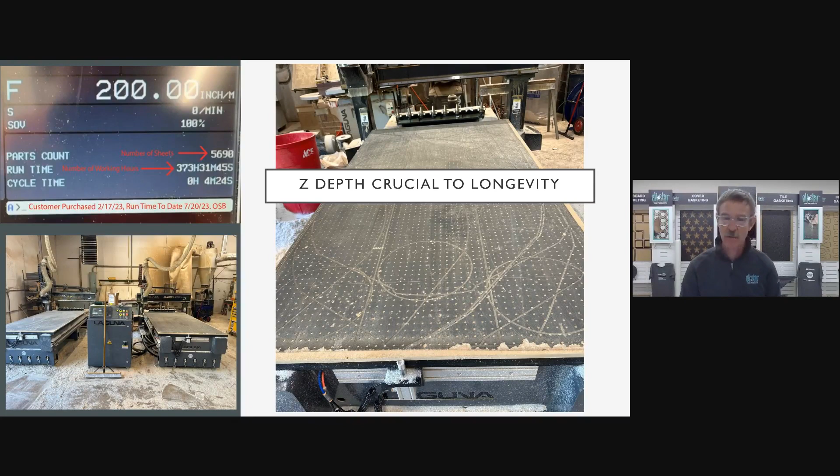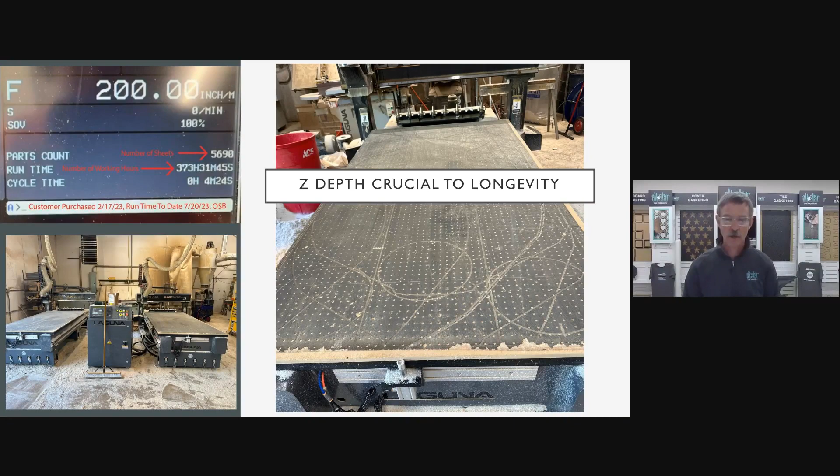And what this customer was able to do was eliminate the need to use tabs, eliminate the need for onion skin cuts. He's also eliminated the need to fly cut his spoil board, right? If we keep that Z tight throughout these 373 hours of machine time, he doesn't have to fly cut the spoil board at all. And I'm not sure how many times you guys are watching your CNC fly cut. It's not making you any money at that point. As my wife says, you want to make your machine make you money, not cost you money. Fly cutting is costing you money. You want to be making parts. And the less fly cutting we do, that's the way to do it. Let's dial in that Z on the tile gasket material.

This is our new version of our tile gasket. It came out earlier this year at the AWFS trade show. We took the feedback from our customers and changed a few things. The tiles are now larger, 2x2, so it takes a little bit less man hours to get them out onto the table, or man minutes maybe.

And we also have offset the hole pattern so it's not squared up. Our version 1 was kind of squared up like a pegboard in your garage. The new set is a little bit offset, so all of our cabinet shops that really enjoy using this material, as they cut those square cabinets, they don't go right over those tool paths. The offset creates a little bit of perfect imperfection and a little bit more randomness to what size parts you're cutting out.

So that will bring me to another opportunity to throw it over to Daniel. We'll give you a quick rundown of some of these tile gasket performance differences. Daniel? Mike, thank you very much.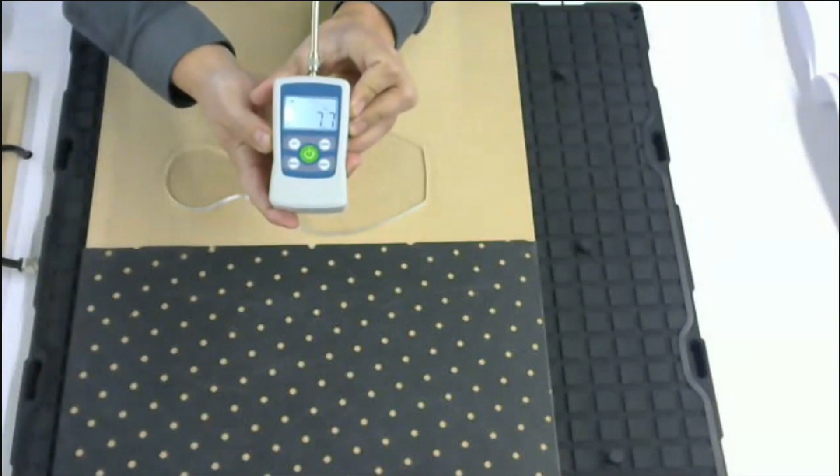Again, taking my pressure meter, a little bit better on the pressure here. We're at 7.7 pounds of pressure, and that has to do with the fact that most of the surface is covered with our tile gasket. I'm going to reset this to 0, pick up this part here. And the best part about our tile gasket is that random patterns of that 70-degree offset allow for the maximum amount of vacuum ports to be underneath the single part.

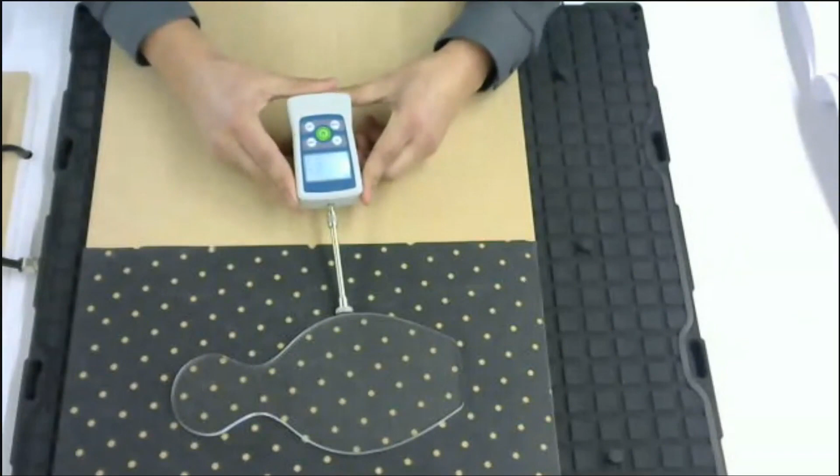This acrylic sheet here is a perfect example. You can see how many independent pockets fall across the single surface here. So oddly shaped parts, changing parts, small sizes. We have success with parts down to 3 inches by 3 inches, but I'm up to 51 pounds of pressure now just by using this tile gasket, sealing off a good surface, and then concentrating those vacuum ports, essentially creating micro suction cups across my oddly shaped or small sized parts.

So that is how the concept of the tile gasket works, let alone the friction of the mat as the material compresses into it. So this is a great concept for those that are doing changing part shapes, sizes, different materials. If you're switching between melamine, acrylic, plywoods, anything like that, this is going to be a great proof of concept for those with changing parts instead of doing a dedicated fixture. Mike, back to you.

Daniel, fantastic. Thank you for giving that a show. And yeah, that's the benefit of tile gasket leak prevention, as well as vacuum clamping ability that is not always available in just simple downdrafting. So that brings us to a couple of examples customers have sent us. Again, another Laguna, just coincidentally, doing parts. It was another customer that gets massive use out of one set of tiles.

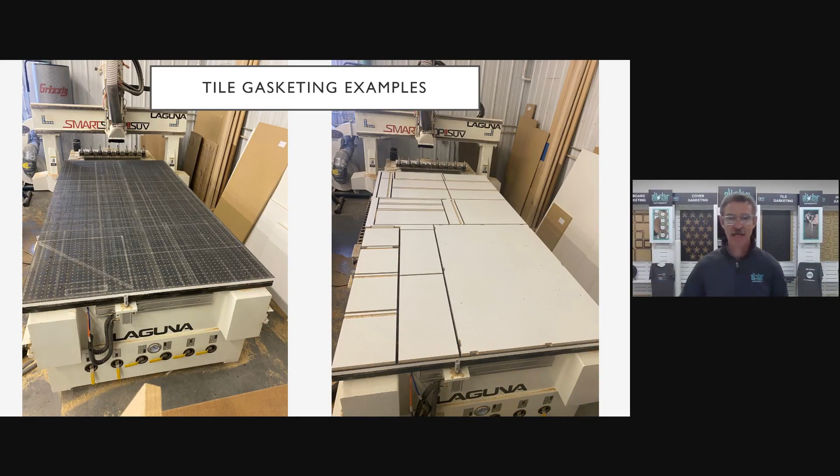But one thing I also wanted to bring up was this unique kind of concept. Like I say, our customers are better at this stuff than we are sometimes. We sent tile gasket out to both of these customers, thinking that they were going to be using it in a kind of a spoilboard environment, just always cutting random pieces. But this customer created, in a way, a dedicated fixture concept for his production pieces using tile gasket products. And what I found interesting was this: we always follow up with our new customers, make sure things are going well.

And when we followed up with these customers, like how are things going with you doing this in a spoilboard environment, they told us they did a dedicated fixture production run piece, and they spent very little time in creating that dedicated fixture. They didn't have to do any extra CAD work. They didn't have to create the vacuum channels or the gasket channels. The fact that they can just stick this stuff down and then just get that same part over and over and over again was a great solution for those guys that they didn't have before.

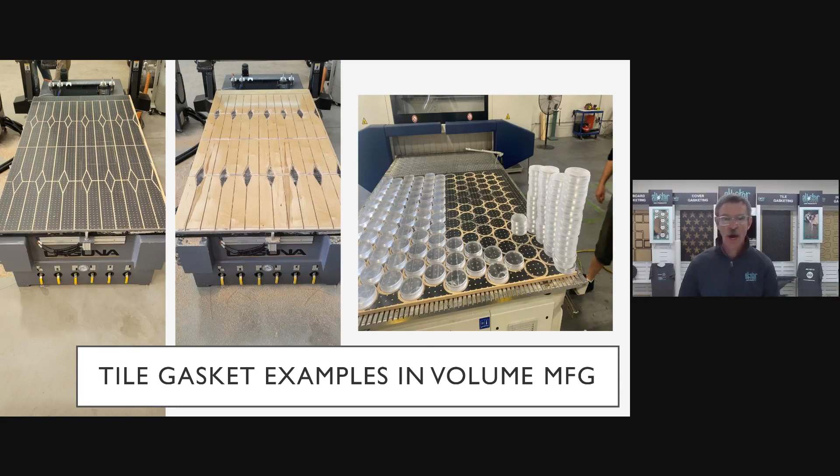So that brings us to the end of at least the 5 different product groups; there is no end. There's always stuff we could go over, but we're at that hour mark. But those are the 5 products that we've addressed to create better vacuum performance on CNC routers. Only company in the industry doing this kind of work. The grid gasket for the grid itself. We have the cover gasket, the inboard gasket for those dedicated fixtures, the tile gasket and the onboard gasket for kind of the spoilboard setups.

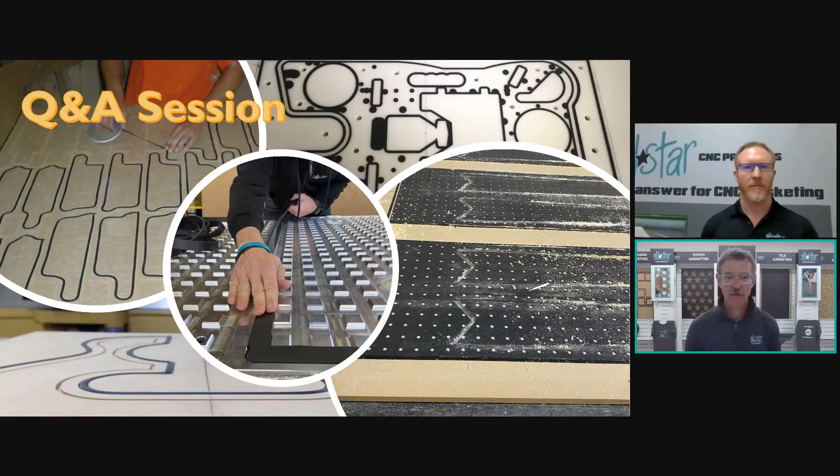Todd asked you to talk about vacuum pump size. Great question, because I think vacuum pump size is not as important as some may lead you to believe. If somebody comes into your shop and says you need to buy a bigger vacuum pump in order to do this, I completely disagree with them. I think the size of the pump is less important than how you're using it. We've dealt with many customers over the years that have said they've invested in that bigger pump that they were told to invest in and still are having problems holding their parts.

So they do some more research and they eventually find us and we get them some gasket solutions, and now they're holding parts. Because if you got a hole in your boat, do you want to get a bigger bilge pump, or should we fix the hole, right? Let's fix the holes and eliminate the leak. And then sometimes a very small vacuum system, Daniel's demos that he was doing, I think we got a 0.5 horsepower pump, not a very big pump, but we got massive clamping ability with that small pump because we've sealed everything and it's an airtight solution.

So if someone tells you you just need to buy a bigger pump, send them our way and I'll let them know that there's much cheaper, much easier solutions to install and test than that big vacuum pump improvement, which also will lead to higher electricity costs, more heat in the shop. I mean, you guys all have big vacuum pumps, most likely with the machines that you have now, and bigger and stronger isn't always the answer to vacuum pump strength.

Before we wrap up, Mario, there was one thing I want to address. I'm seeing a couple other comments, and we'll just take a quick moment. We've got at least a couple left, but